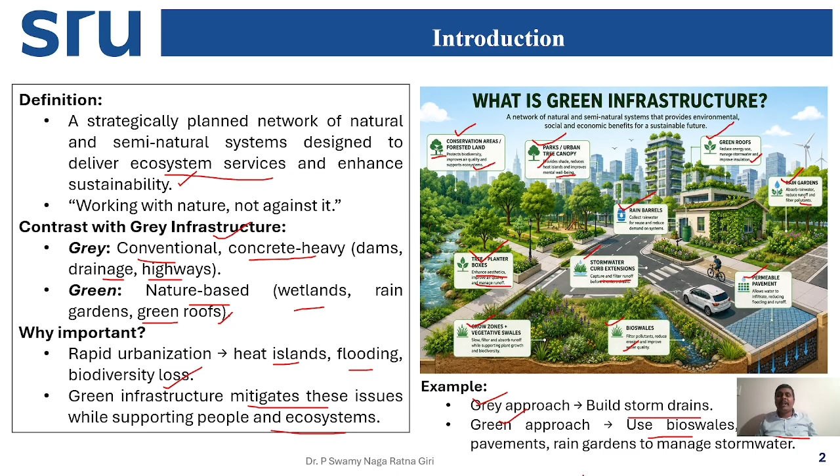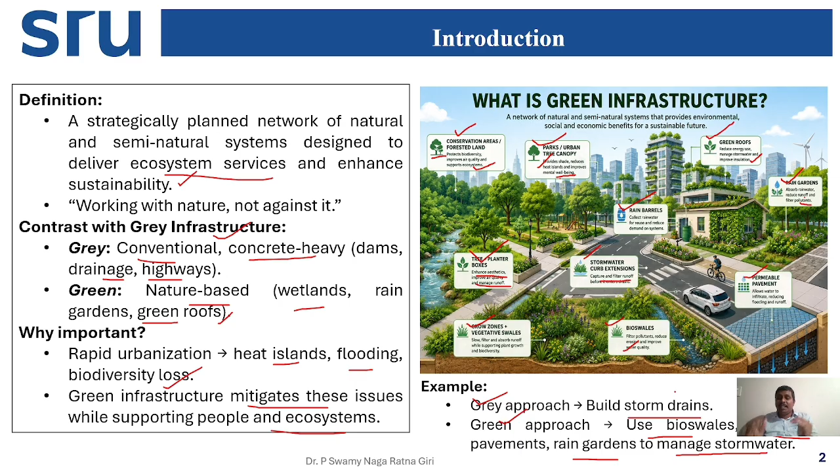For example, in the gray approach, you build storm drains; in the green approach, you use bioswales, permeable pavements, and rain gardens to manage stormwater. Instead of building drains, we can go with bioswales or permeable pavement, rain gardens, to manage the stormwater. These are very important parameters to understand how we can make a green infrastructure rather than going for a gray infrastructure.

As I was talking about green and gray, there is another zone called blue-green infrastructure. Blue-green infrastructure is one of the most important parameters: a planned interconnected network of natural and semi-natural areas, including water bodies and green and open spaces, that provide different ecosystem services. This type of blue-green infrastructure helps interconnect nature and natural and semi-natural areas, including rivers, lakes, wetlands, parks, forests, and green spaces. It delivers multiple ecosystem services.

For example, river corridors can develop wetlands, urban green spaces can be developed, and green corridors can interconnect lakes and water bodies. Blue-green infrastructure is more efficient as it interconnects water bodies into the infrastructure. That is the most important thing: where plant growth will occur, and we want to interconnect lakes, ponds, and water.

Then what about green infrastructure? It is a planned network of natural and semi-natural areas with other environmental features, designed to manage and deliver different ecosystem services.

What are there? We can develop green roads, urban forests, bioswales, rain gardens, permeable pavements. All of this together, as we discussed earlier, we can develop as green infrastructure.

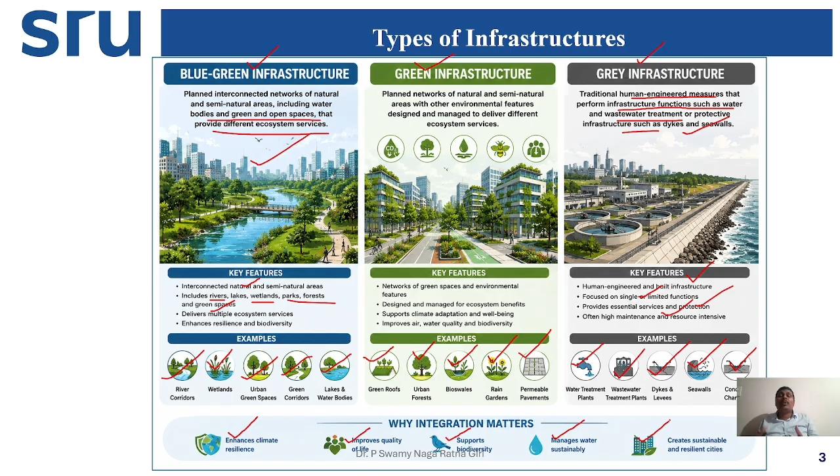Next we will discuss the components of green infrastructure. As I discussed, the components are very simple. When you talk about green infrastructure, one should understand green roofs and urban trees, which provide shade, reduce the urban heat island effect, and enable carbon capture.

Rain gardens absorb rainwater, reduce runoff, and filter pollutants, improving the groundwater table. Bioswales are natural channels that filter stormwater and improve water quality, while also safeguarding the soil. We have permeable pavements, wetlands, and street trees, which improve air quality, provide shade, and enhance aesthetic value.

Roadside rain gardens are very important to capture, clean, and infiltrate stormwater runoff. So what would be the benefit among all these parameters we are discussing? We get urban green infrastructure by installing green roofs, urban forests, street trees, rain gardens, bioswales, and permeable pavements.

So finally, regional natural green infrastructure offers a lot of benefits we can engage with through these facilities or solutions: it reduces flood risk, improves air quality in the surrounding area, supports biodiversity, lowers surrounding temperature, enhances human well-being, mental and physical health, and builds resilient smart cities. Altogether, it can manage stormwater naturally.

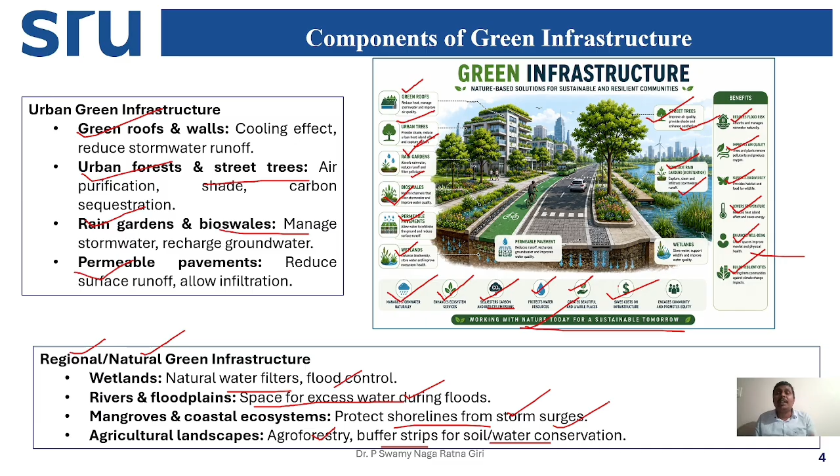So I hope you understand the components of green infrastructure and its types. Now coming to the benefits, I have clearly explained how effectively we can get the benefits and ecosystem services of green infrastructure. What are they?

One is improved air quality—large amounts of emissions are absorbed as pollutants, and oxygen is produced. And sequestration of carbon—sequestration means plants absorb and store carbon, mitigating climate change. It also reduces the urban heat island effect, as vegetation cools the air and surroundings.

It manages stormwater in a perfect way, where green spaces absorb water, preventing flooding, and reduces noise because of the vegetation barrier in the surroundings. It also increases property value—a green environment enhances aesthetics and boosts desirability.

It enhances water quality—plants and natural systems filter pollutants and improve water quality. Then we have improved health and well-being for people in the surrounding region, as green spaces reduce stress and encourage physical activity.

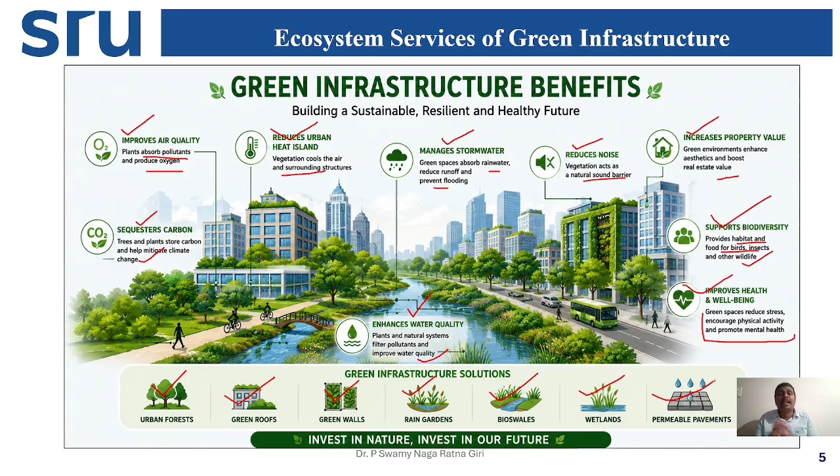Altogether, this helps support biodiversity, providing habitat and food for birds, insects, and other wildlife. So we can create urban forests, green roofs, and green walls. Many flyovers are already designed like this, and rain gardens are very important too, along with bioswales, wetlands, and permeable pavements. We've discussed all of this already, but you have to understand how to effectively manage these things and get better green infrastructure benefits.

Coming to case studies, the Delhi government developed a zonal map where creating green wetlands or green infrastructure is a must, which helped reduce pollutants through expansion. Hyderabad installed green flyovers, with walls mixed with greenery.

The plants are planted, and Delhi also installed a large number of trees, that is mangroves, given in the particular state. This shows how we can incorporate this greenery infrastructure to reduce carbon emissions and improve the air quality. Hyderabad's rainwater harvesting plus urban lake revival helps us decrease runoff and get better water storage.

The metro line project, which has a lot of greenery around its surroundings, is very important. In Delhi, a lot of area was covered by greeneries and small forests, which is also very important. Roadside, they have also planted a large amount of trees. This helps maintain a good amount of greenery in the IT parks too, with small amounts of area given for this greenery. In Hyderabad, the flyover columns also have this greenery.

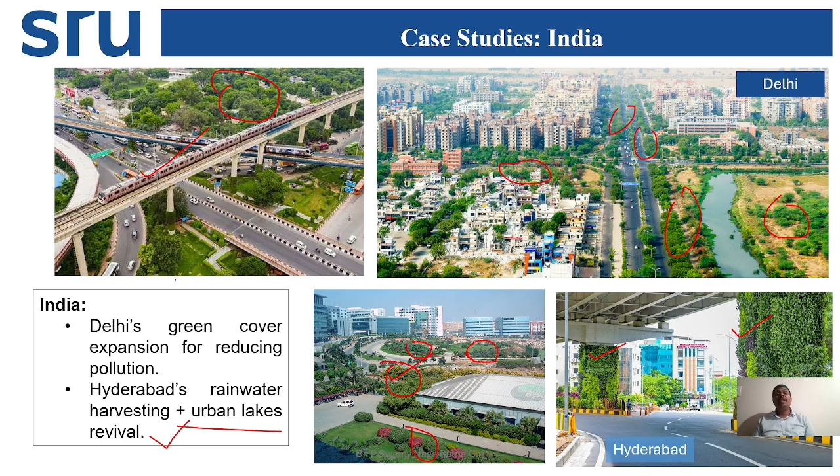So these are some of the case studies. We should understand how effectively we can manage these areas to reduce pollutants. This will help us achieve betterment in human lives, as well as gain importance in green infrastructure facilities. Once we have these facilities properly, they provide proper rainfall, reduction in runoff, and reduction in heat waves. All these things help us understand how effectively we can manage this greenery system adoption in infrastructure.

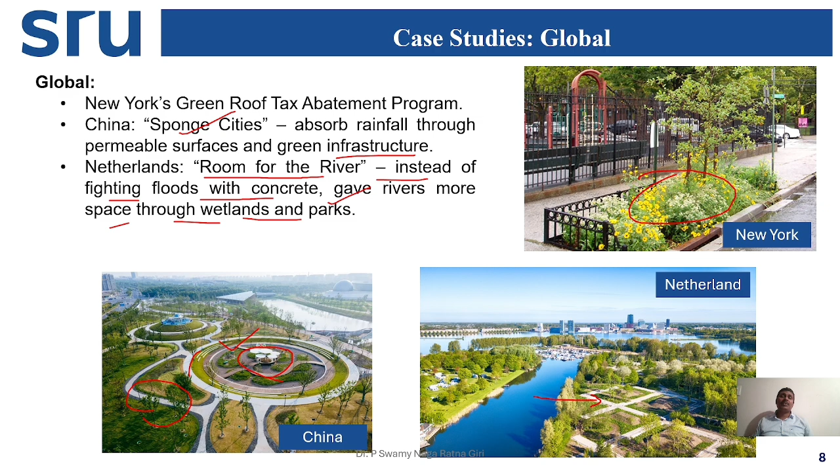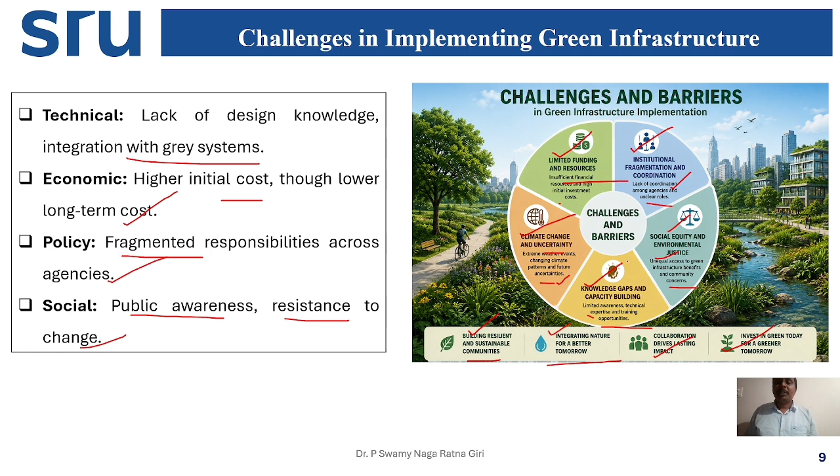So then we have equal social equality as well as environmental justice. All of this, if resolved in a proper way, will no longer be called challenges and barriers. So we should understand how these challenges can be addressed through policy integration.